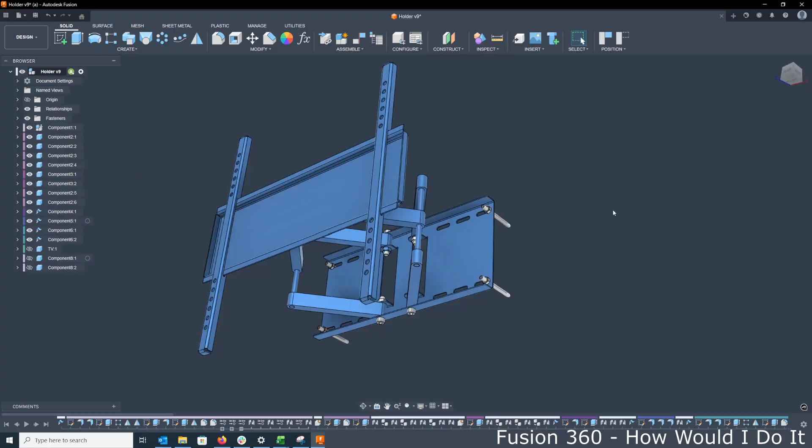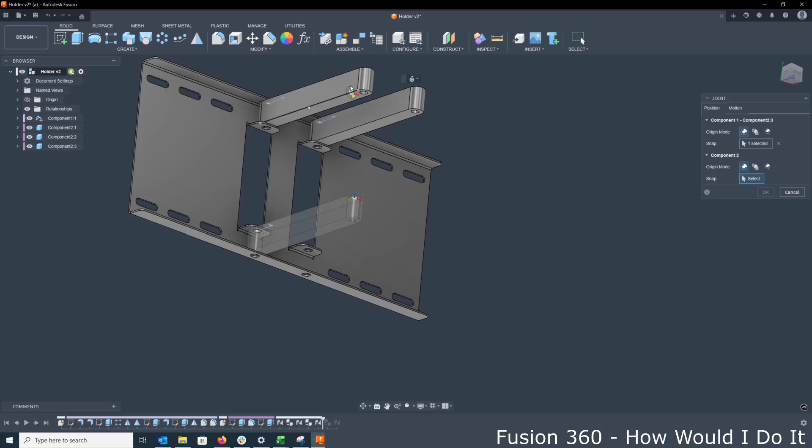Now we will try to add a few more components to our assembly, especially those arms. Also, first we will try to connect these arms to define movement, upper and lower arm, so they move together. We will use cylindrical joint.

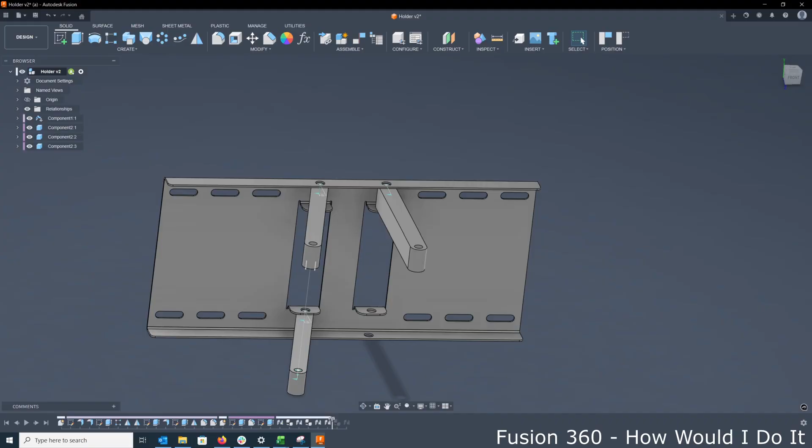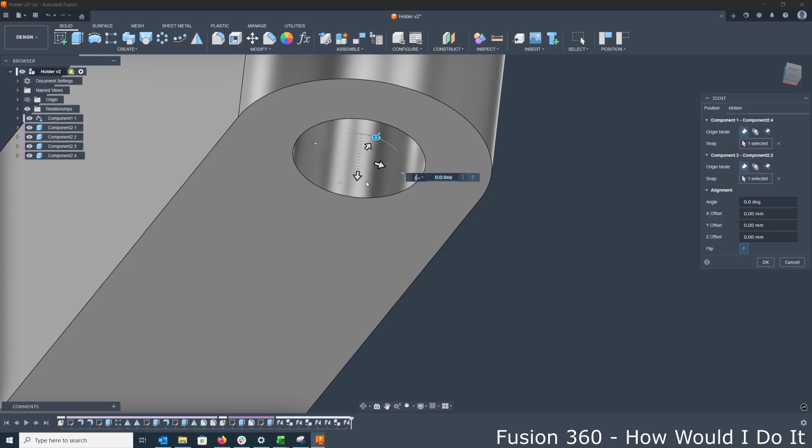And now when we move one arm, this lower arm also moves. We'll do the same with these two arms on the right side. As you see, they don't move together, those arms from the right side. So go to joints, select center of the circle, cylindrical is already selected, cylindrical joint, and click OK. Now they move together.

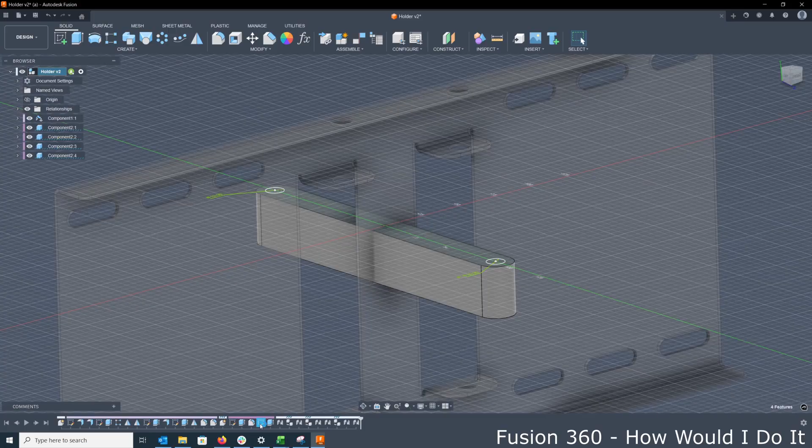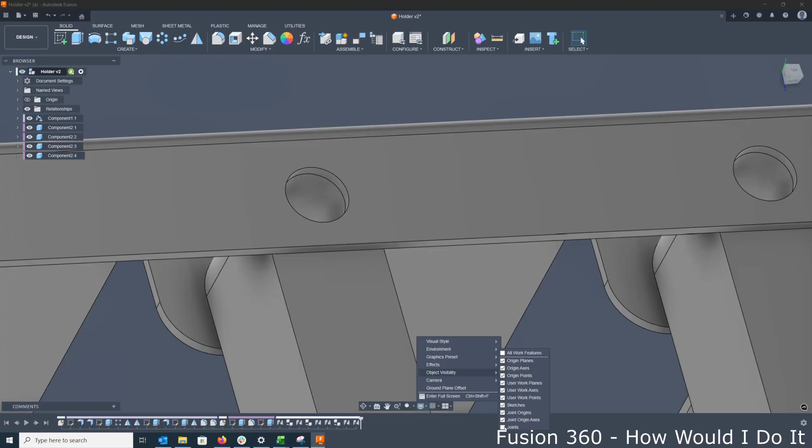So we will now create some element to connect these two arms on left and one element to connect arms on right side, but we will edit this dimension to 11 instead of 10. Now we have larger hole, and we will remove this joint symbol.

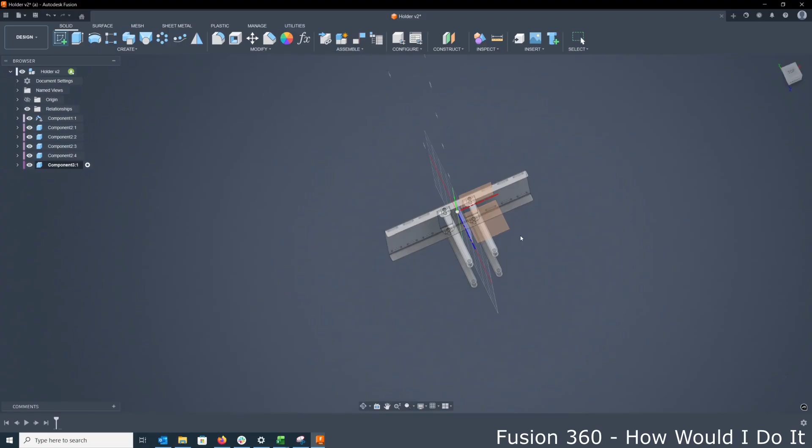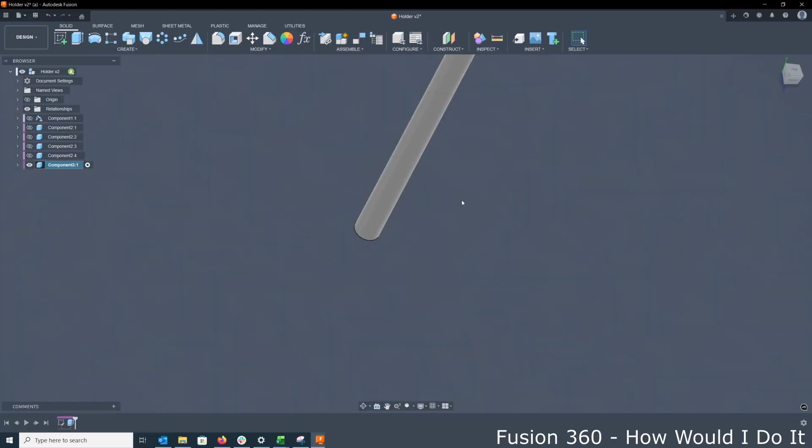Now we will create new component. Component to connect these two arms. That will be some cylindrical part, 10 millimeters diameter, so it can go to this hole that we created. We isolate this element, extrude, give some dimension that we can edit later, unhide all elements,

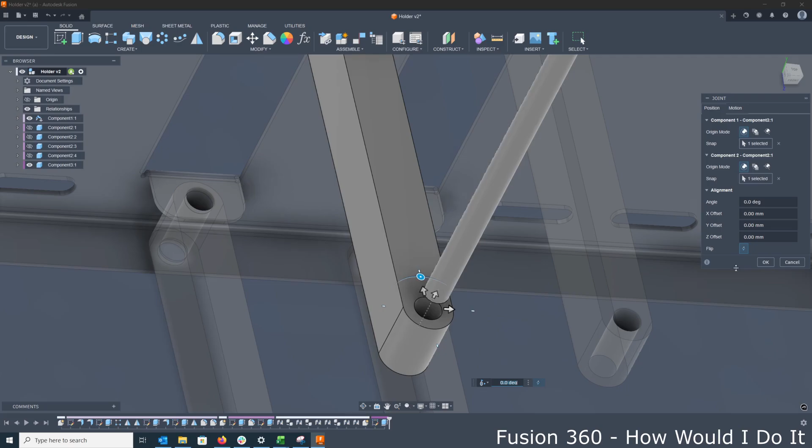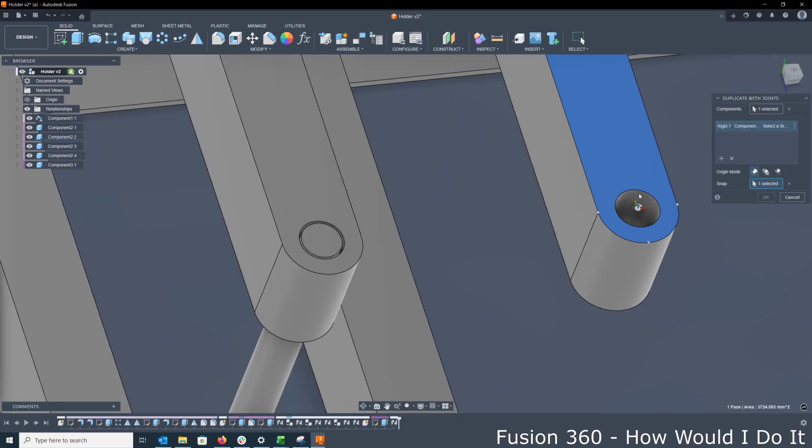and now we will create joint. Select this point and center of this hole, but on the opposite side, rigid, this will be rigid joint, and click OK. So since we already created one, we will just duplicate with the joint this component to here, and we will have the same joint as previous. In this case, this is what we need.

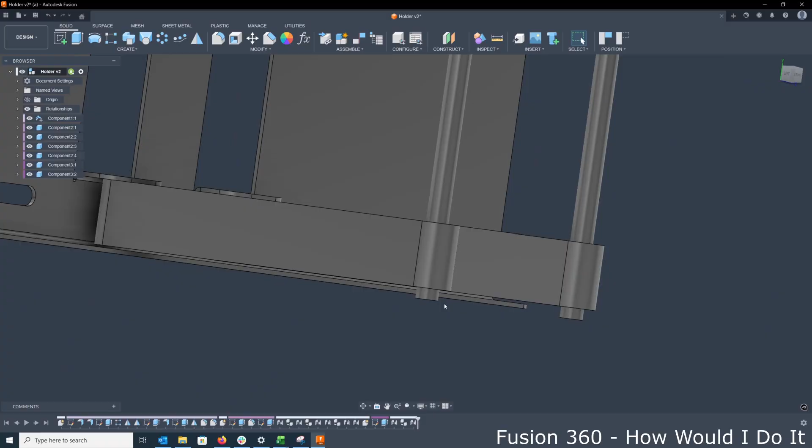This is how it looks. So it looks okay. This is longer than we want, so let's make it 195. Let's check. This seems okay.

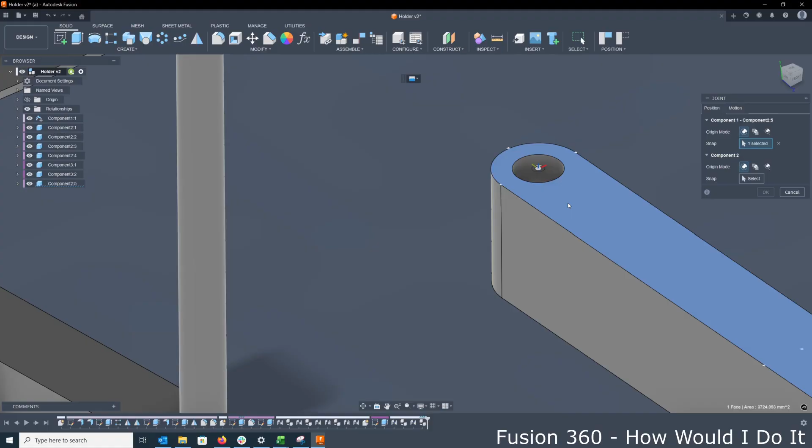Now we will copy this component, Control C, and paste, or Control V. Okay, and we will apply joint. Center of that hole goes to center of that hole. This will be cylindrical joint, so it can move along this axis.

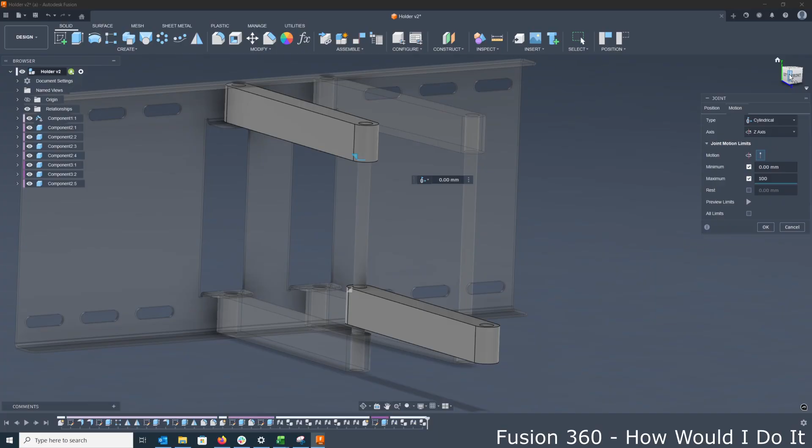I guess we should limit this. Let's say that be 0. Let's try 100, 110 maybe. Let's see. It's too much. 108, I guess. Yes, that seems okay. Preview limit and it looks okay.

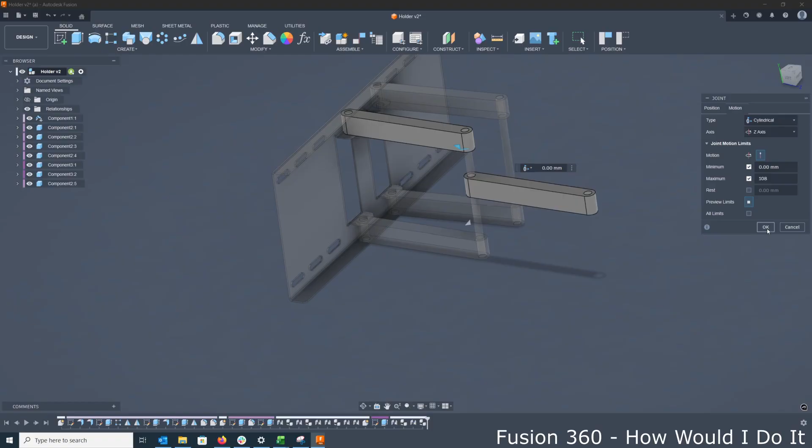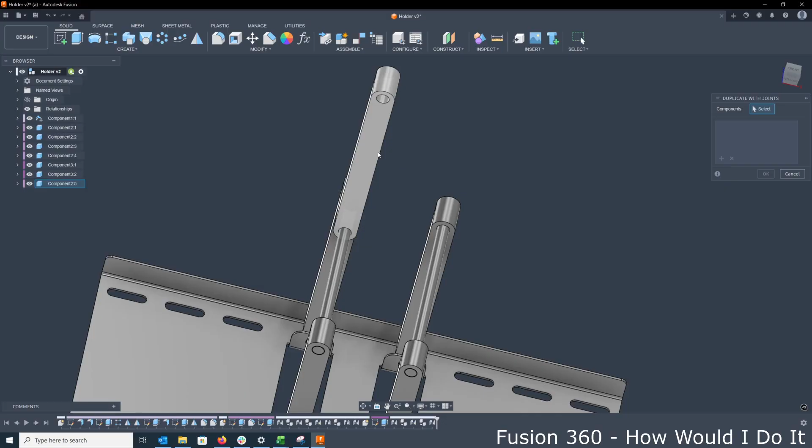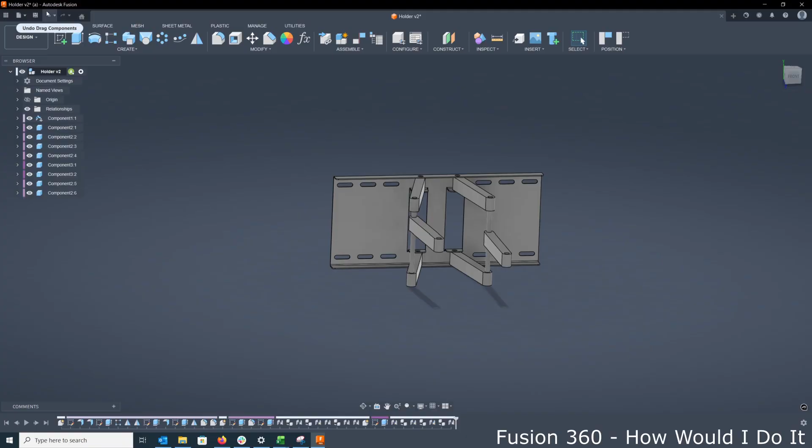We can also apply joint, duplicate with joint. We don't want to capture this position. Move back arms as they were earlier. So select this component and joint to this. So now we have the same joint as this first arm on our left side, and it moves okay. Let's save design.